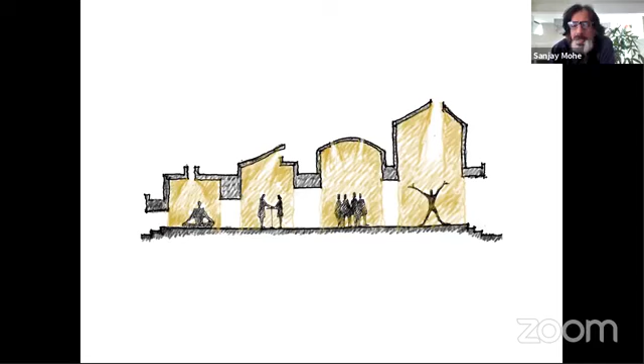So when you're designing it, you're actually putting all these elements together, trying to weave the whole story, which eventually becomes a building and becomes an experiential process as you go through that whole journey of discovering architecture.

Now, we tend to do a lot of schools, and then you start asking: what is the right classroom? Or forget classroom—classroom is actually the answer, but the question is, what is the appropriate learning space?

And then you think about Rabindranath Tagore's Shantiniketan, where everything is taught under the trees. There are really no classrooms—you just go sit under the trees and learn. You begin to realize those are probably the best places to exchange knowledge, where you're just in the presence of a teacher imparting knowledge into you.

But because of certain requirements for protection from rain and sun, you need a kind of pavilion. These pavilions—you find so many of them in Nepal when we visited last time—historically were probably not only places of worship but places of learning as well. The guru would sit on a slightly elevated place, and all the shishyas would sit around for a discourse, and that would be the place of learning.

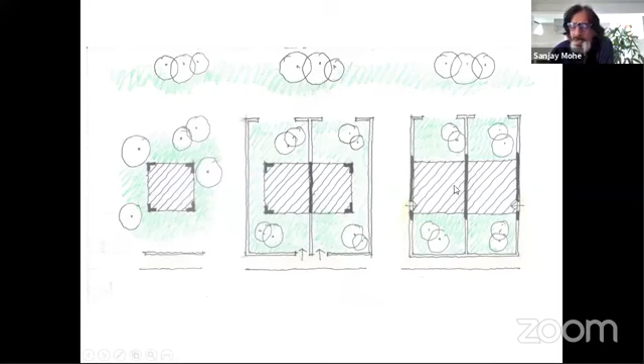So we took that as a module, and we started working on it, where you have this series of classrooms with courtyard on either side, which eventually leads into the green space outside.

So that's the section where there is a central courtyard, which is common for everyone. And then you have these attached courtyards, and then you move around. So this is like a pavilion which opens out into the court on this side, court on the other side.

If required, this is in Hyderabad. So when the temperature goes beyond 40 degrees, you can enclose it and air condition it. But otherwise, it is open.

And you have a choice of conducting a class in this semi-open space, or you can take the children and sit under the tree and work. And this particular school gives you options to exploit all these different possibilities.

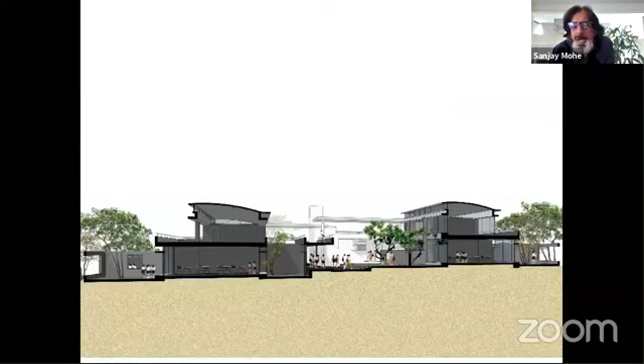So the section, you have this common courtyard for all the children. You have a classroom with courtyard on either side, and then there is outer space. And this is something which typically happens in our courtyard house, where you have a road outside, you have an open space, then you have a semi-open space as a courtyard, then you have a semi-enclosed space as a veranda, and then you have a closed space where you need privacy, security, and things like that.

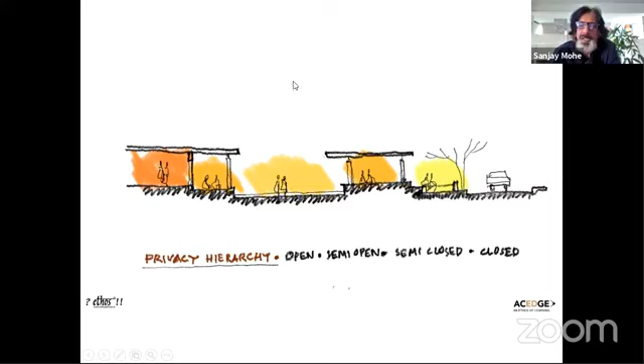So the house is a series of these enclosures of different privacies, where you have a hierarchy of privacy, where there's a place outside where you communicate with the outer world. There's a space inside where you communicate with your family, and you communicate with the sky above. And that's how we started building this school, giving those different kinds of privacies.

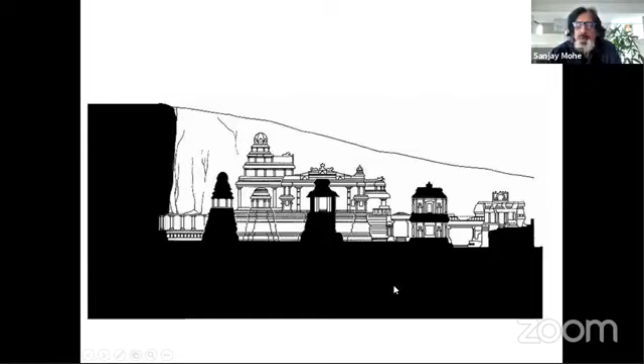And this was something amazing too. This rock, it is part of the hill, part of these wonderful spaces. And this is how it looks when it is carved out. And then we were thinking of relating that to creating some kind of a non-building which would become part of the nature, which will get absorbed into the nature.

So we started with this as a water body, which is a bio lake. Then we created this shallow lake, which is for the firefighting water, which you need about 3 lakh liters of water for firefighting, which became a shallow lake.

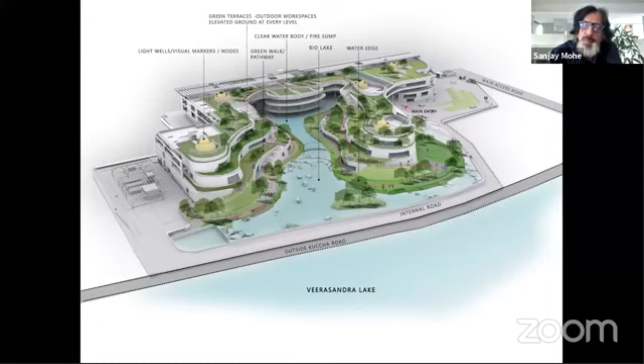And then you can walk across the entire skin of the building. And they wanted a nature campus, which is what it is. And during lunchtime, you walk across this and you meet all your friends, colleagues, and interact through. And then there are these 5 vertical kind of atriums, which symbolize each of their Titan verticals, jewelry, watchmaking, and things like that.

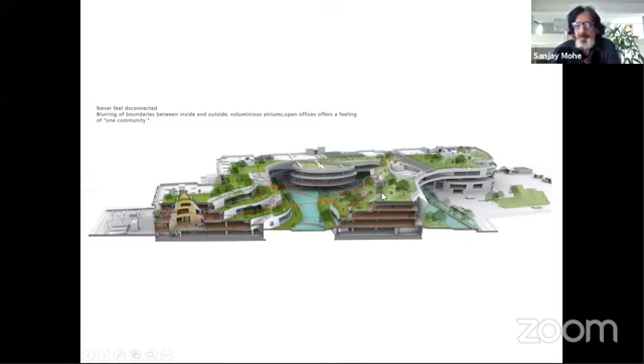And then there is a lake next to the site. So we were trying to relate it to the natural lake, to bio lake, to this shallow water body. And then you have a connection from here across, right across, and connect it almost to the horizon. And you bring in light from the top. And as a section, we were working with these terraces along the water, and then creating almost like a valley along the water, and creating a lot of interactions along.

And right from the beginning, we wanted this to happen, where even Titan was very keen that people should take their laptops, go sit under a tree and work. So you have a possibility of working indoor or outdoor, and that's what happens. So the entire office is like a veranda. It's like a glorified veranda where whenever you want, you just come out and sit.

And this is not an air conditioned space. It is air cooled. There is a humidifier, and this is evaporative cooling, which is used on a very large scale. So during this situation, the COVID situation, where we don't want air conditioned spaces, this seemed to work much better, because there is 100% fresh air pumped into this. There's hardly any return air which comes in, so you are always surrounded with the fresh air. And there is a large saving in terms of power consumption.

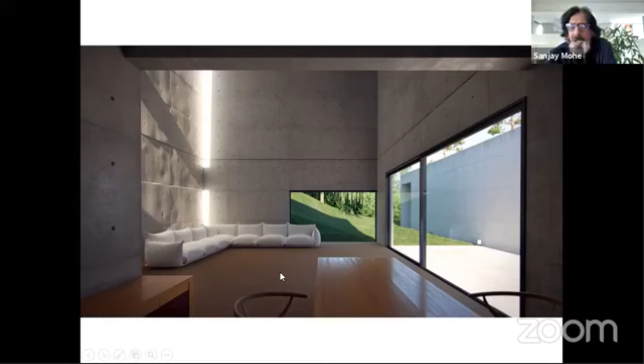But as an Indian, or even as a Nepali, I don't think so we will feel very comfortable in occupying this space, because our culture is more about absorption. And this is what we see in a typical marketplace.

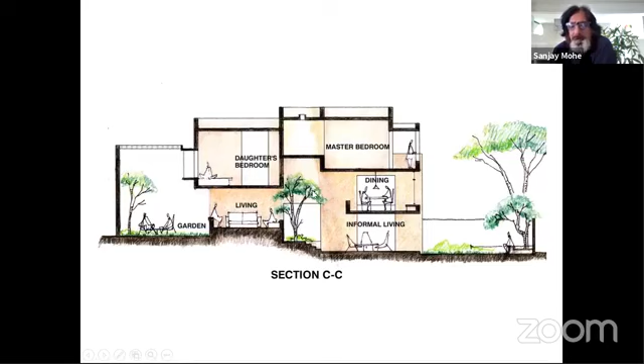This person, Anil and Champa, are very close friends - I'm in this house almost every 15 days, so I'm really almost like part of this family. I keep telling them they should remove this, but for them these are memories. Every time I tell them to remove something, they say, no, I have a memory of this, I bought it from there. So for them, the house is a collection of memory.

And for all of us as architects, we cannot impose our ideas and say that no, it has to be a minimal house - you can't add this, you can't add that.

What you have to do as an architect is create a place for those memories to happen and exist, and that's how it becomes a collection of memories. This house is not for you to photograph and publish. It is for Anil and Champa to stay there and enjoy those spaces. These are their memories, their possessions, and they have to be happy and comfortable, as each one is linked with something of the past. So that's one project we completed long back, and now we recently finished one.

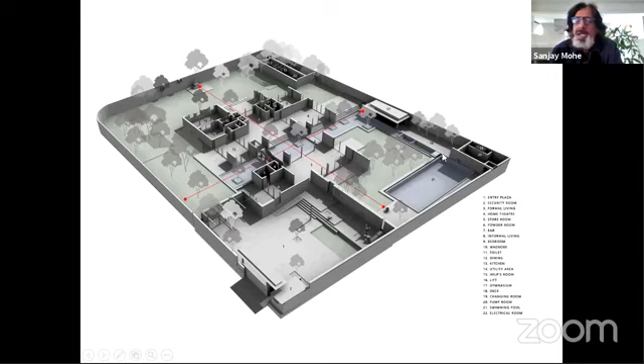You climb up to an informal gathering area. There is a bar here, opening out into the large party lawn. This is the dining area, kitchen, and utility. Then there's one guest bedroom here, an informal living room which opens into the large green space, a gym, changing room, and then servants' quarters.

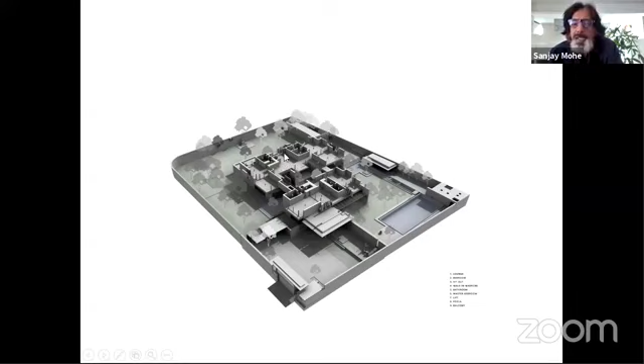On the first floor, there are four bedrooms with a breakout or informal area, and each room almost opens out onto three sides, with a large terrace attached to each. That's quite nice—you are almost within the trees, with branches everywhere surrounding you. So whenever you are in any of these rooms, it almost feels like a tree house, which I'll show you in the pictures.

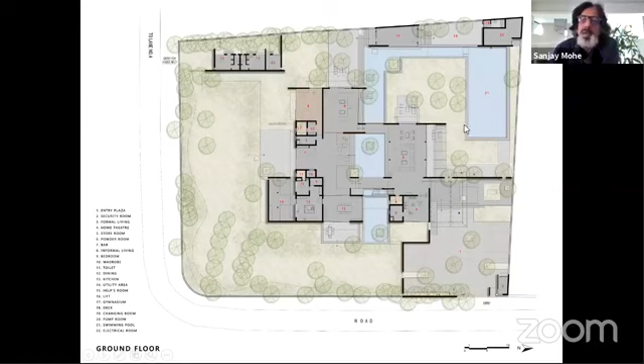So that's the plan where you come in, that's one room, the living room, the dining area, formal living room, and then the informal living room and other places on the upper level—these are the sections.

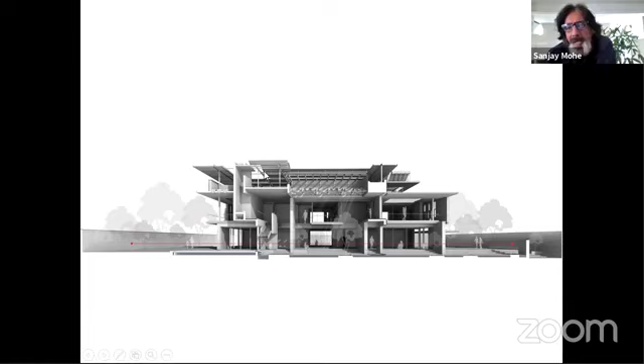This is in Pune, and Pune summers can get pretty hot. So we have this shading device with a large gap of almost 2 meters at the top, so hot air goes beyond that and gets flushed out. It has louvers on all sides, so the air goes out and that really controls the temperature within the space. That's the skylight, and these are the other sections—the whole volume feels like one connected space.

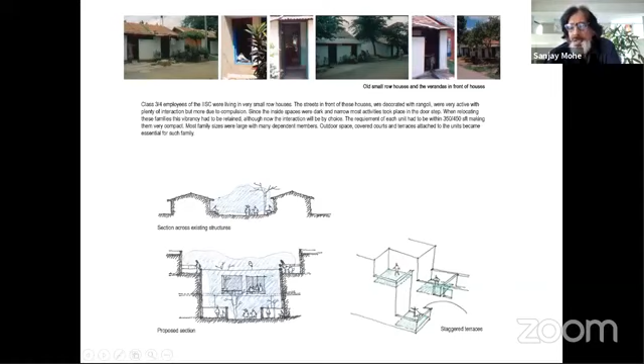A lot of activities could happen during the daytime - even the kid can sit and study here. So we created these terraces at different levels and started creating this whole street with bridges going across, with only 2 of these elements turned to create dynamism into the whole street, and there's a lot of openings here.

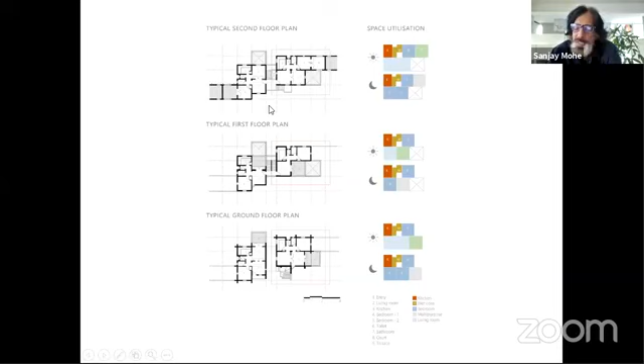These are more like a series of rooms because the rooms were so small, and normally the family structure is very large. So at night, the living room would be used as a bedroom, or even the kitchen could be used as a bedroom. We were trying to analyze the area - how it would be used during daytime, and how during nighttime it would turn into 3 different rooms for different uses. So it was built on that basis, and this is how it looked.

And you will see those different terraces. There were issues here in terms of us not being sensitive enough to understand that they would start using these terraces for washing clothes and such, which created a problem for the people staying at the lower level. But we learned a lot of things through this, so it was a nice exercise.

The idea was that even those who stay here would feel connected, with the way these creepers were grown and things like that. And the kind of activity we were looking for started happening.

And now this is what we have done, after so many years. We were looking at something that had to be constructed at very high speed, because use of technology was important. This was again for the affordable section.

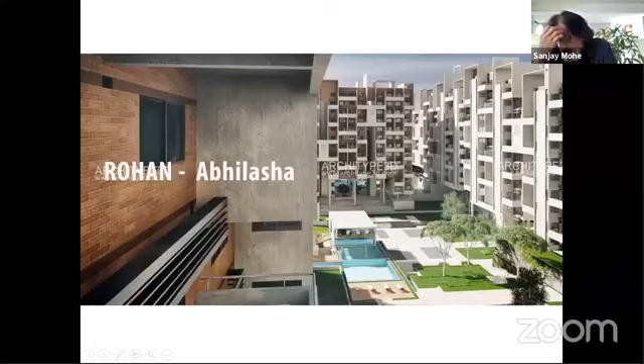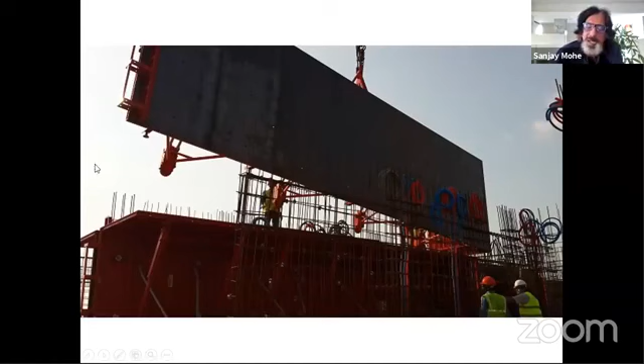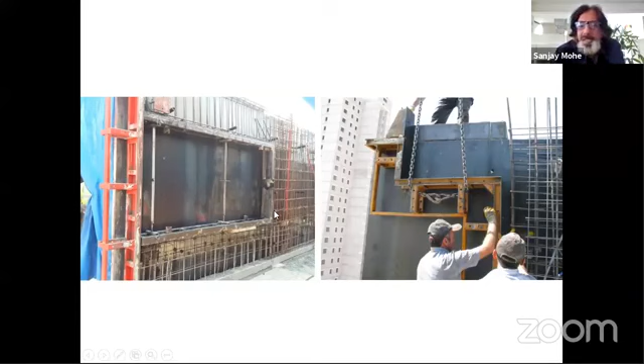So we went to Turkey to understand this tunnel forming, which is a formwork like this - I'll just explain it - which is lifted up and placed into position. Then you have all the services built into that whole fabric, all the windows, electrical things, etc. Then these 2 L-shaped units are tied together, and the entire thing is cast at a time. You have to build this platform.

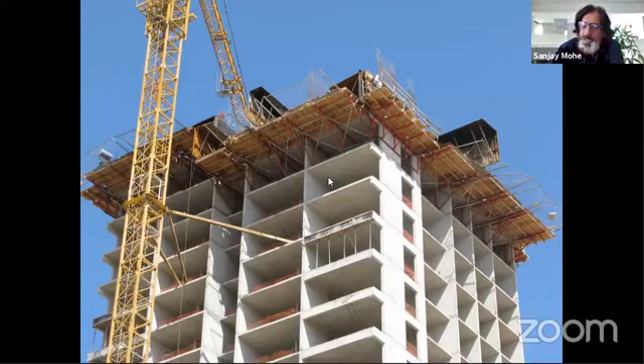Now this was in Turkey, and whatever we saw was very, very repetitive, though the quality of concrete was quite amazing. The whole place was very repetitive. So we were trying to see how to break that repetitiveness and make it more interesting.

So the plan had to be built on these modules. As you see, there are these L-shaped elements - they are all put together, creating these tunnels. Then you put all of them together and concrete it together, so you are concreting wall plus the slab together, along with all these openings and things like that.

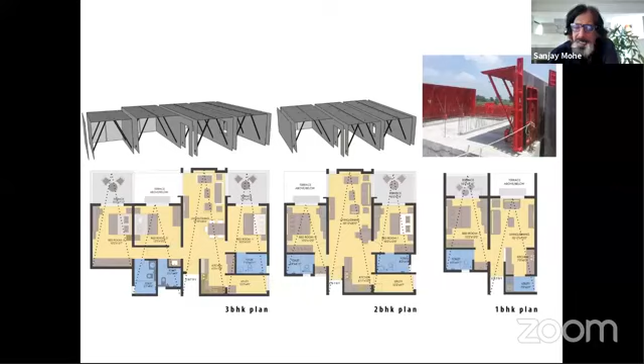Then these tunnels are removed and placed on top, and this goes very fast. Every alternate day you pour, leave it for one day, remove the shuttering, keep a few props to hold it till it gets cured, and then you move on. Literally you can cast 15 floors in 30 days - the speed was absolutely enormous.

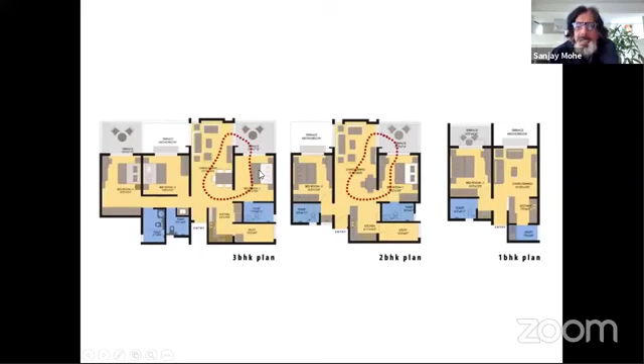So you have these plans, and we tried to create variation in the skyline, which was possible by stopping the formwork at different levels to get a varied skyline. We created a lot of connections across, so that there would be variation.

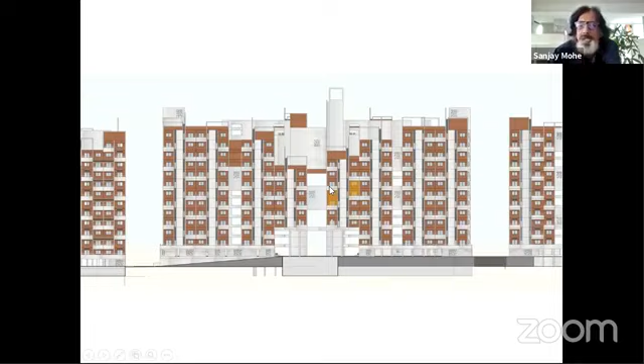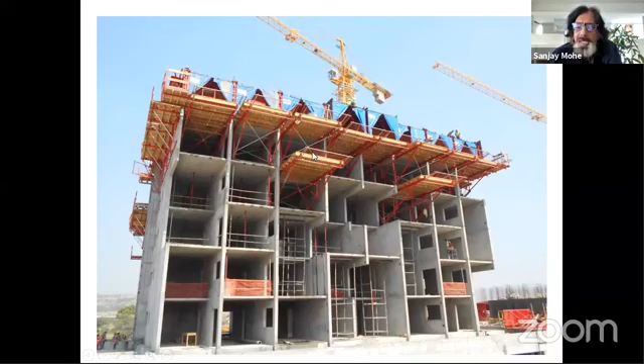And then the most challenging thing was to create double height spaces. So when you build this tunnel on top, you need to have these platforms around. We devised a way of creating these double height volumes, and that's how you see this whole process.

The first 2 floors are built conventionally. Then you build up these tunnels, cast them, remove these tunnels, and place them on top. The whole process goes on one after another - you do this, then that, then that, then that.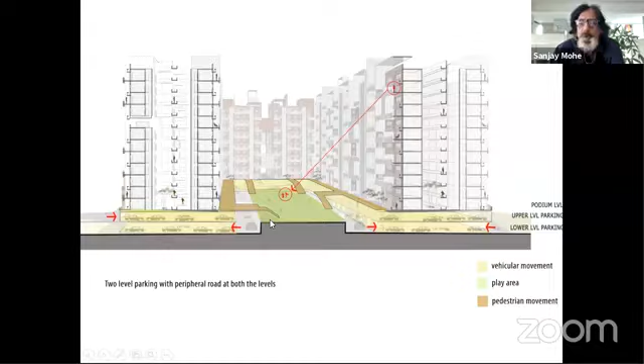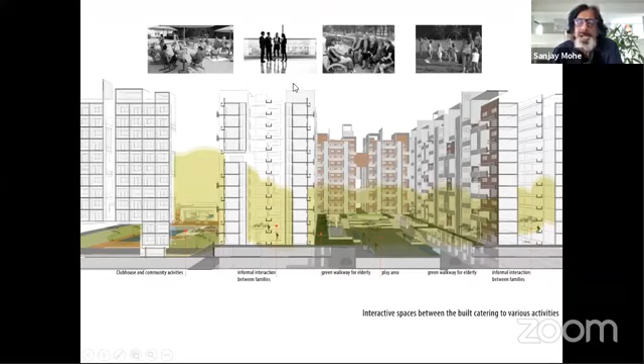We wanted kids not to cross any vehicular road, so there would be a connection with the mother looking at the kid. We created the landscape so that no kid needs to cross a vehicular road to reach a green space. You have these elements going across till you reach the central green space, creating different spaces for different age groups, from toddlers to youngsters to old people, and different kinds of interaction spaces.

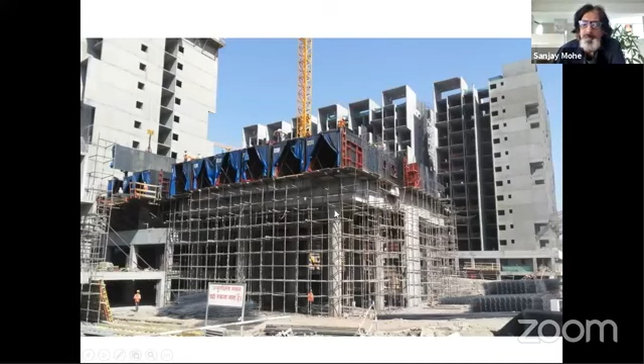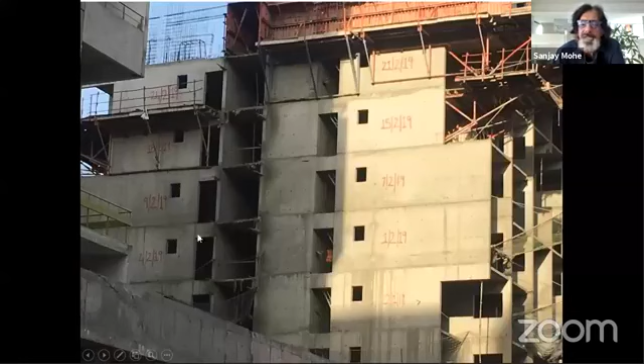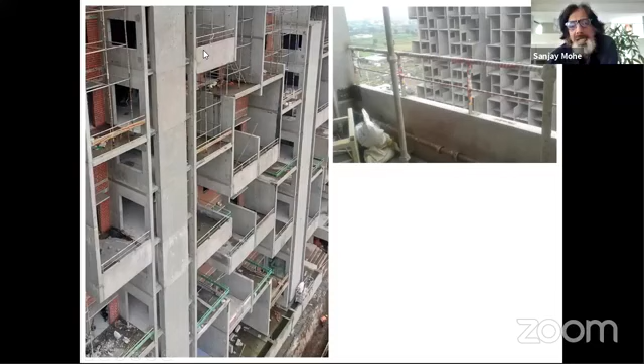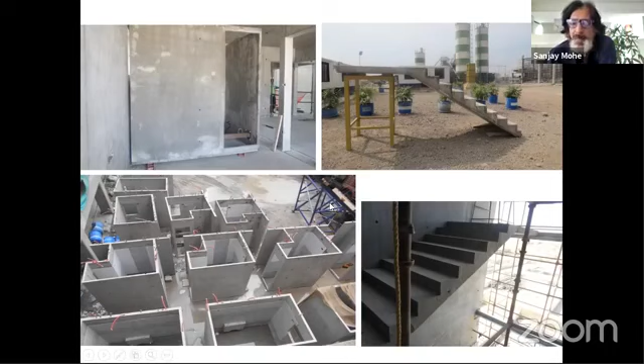Even the different types of railings have different combinations. There are a lot of precast bridges which are lifted up and placed. There are precast toilets done on the ground, lifted up and kept, so you already have a finished toilet to deal with, because you don't have to wait for the tiling of each one to finish. The staircases were precast. That's how this whole thing came up, and this is how it started looking eventually.

Moving on to the institutional project.

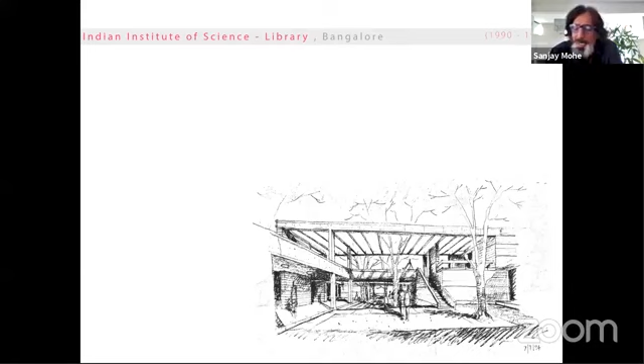So we started with the first approach: to preserve those trees and make them the whole nucleus of the library, building almost like a fortress around that. That's how the whole idea came in. There was one small ditch next to these big grown trees, and we started putting the built-up area around that, because you have to preserve the books and create these necessary enclosures.

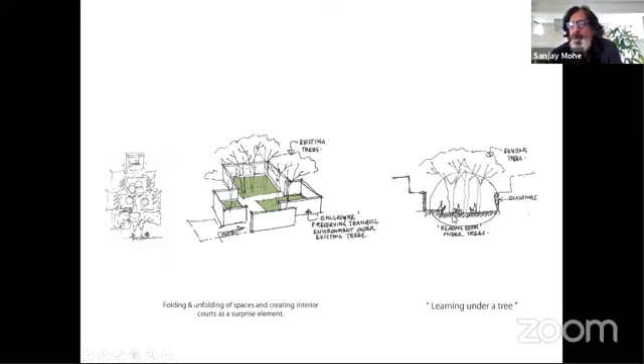The first reaction was - if these are the trees, why not preserve them and create a sense of enclosure where you take a book, sit under a tree, and learn. So this was our first reaction, to use that space underneath. Then we said each one of us has a different way to concentrate and learn - somebody like me likes to look at a blank wall and study.

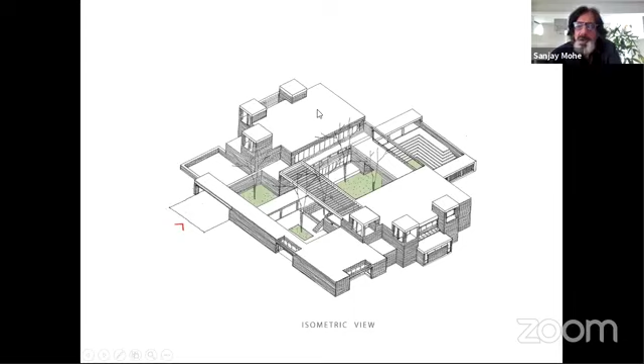Somebody would like to have a double height, somebody would like a very low height. Somebody might like to look out at a tree and learn, or just put their feet in the water and study, or sit on the terrace. So we try to create all these options. You take a book and go into any of these spaces and start doing it. These are all places where books are kept, but you have options of sitting in different places and start learning. This is how it was done.

These are the group of trees which were preserved, so it does look like a fortress, almost preserving the books around. And you have a choice of taking this. This ditch was converted into almost like a temple tank, where you can put your feet into the water and sit.

And now we have done this school, which is recently done. In fact, not yet occupied because of COVID. Otherwise, by now it would have been running. But this is part of the larger complex, next to a play area.

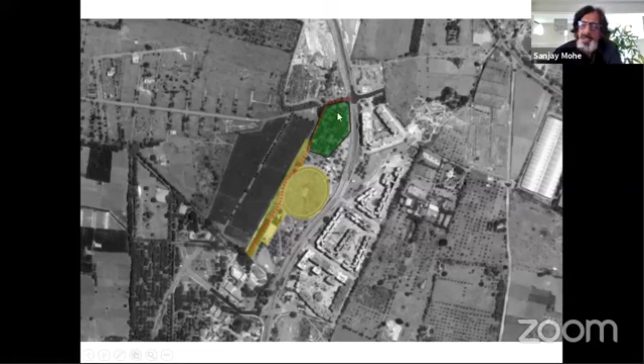So this is where the site was full of trees. And typically you have these different 8 types of intelligences for each kid. Some are smart in music, some in logic, some in spirituality, some are into sports, some into language, and things like that. You have to nurture all these intelligences to create a great learning environment.

For the smaller kids, you can see how energetic they are - they can't sit quiet at one place. So you have to create a place suitable for that, on the floor. It's almost like a school within a school.

The relationship with the teacher is different. The facial expression - she would explain everything with facial expression. See the involvement of the kid and closeness of a teacher and a student, and the way they play with all these materials. When they grow, the relationship slightly changes.

Relationship with the teacher changes. The play area changes. When they go to middle school, their interest changes. Relationship with the teacher becomes slightly more distant. They become more... the activities of games change.

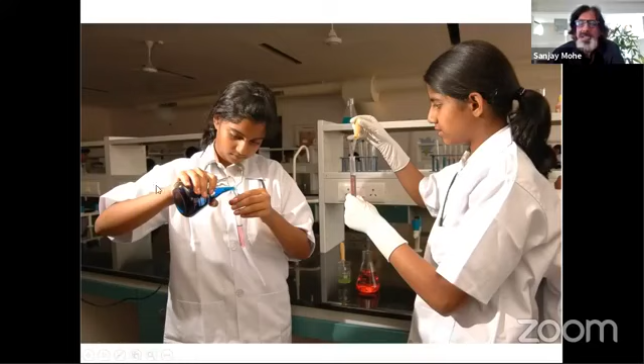When they become adolescent, the whole body language changes. Again, they go into more research kind of analysis. The teacher-student relationship becomes even more distant, and they become more independent. They start doing things on their own. The sports become even more competitive, more challenging.

So all that had to be taken into account - as the eye level changes, the space reach changes, the energy level changes, the play equipment changes, the relationship with the parent changes. They are very close to it here, then it slowly becomes distant. Then when you are adolescent, you want to be independent, not close to the parents.

So even in terms of curiosity, the things and observation become different. Initially, you are very, very curious about everything - parent as a hero, parent as a friend, and then on your own. The relationship to color, relation to music, everything changes. And finally, the communication changes - from being very expressive from your face, crying and shouting, you start expressing through words, through body language, etc.

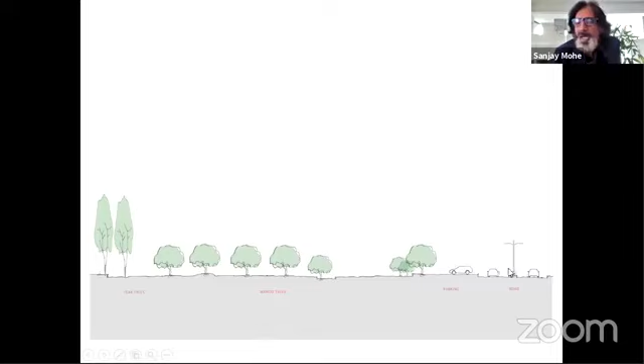So this was a site full of trees, and there is a road on the other side, and we had to build this. We tried to preserve most of the trees - a few which came into this had to be removed, some of them we preserved within the skylight and all that. But the whole idea was creating that transparency at the ground level, where you reach from outside to inside and create this quieter zone here. This is a noisy area on the other side - not noisy right now, but might become noisy after another 10 years.

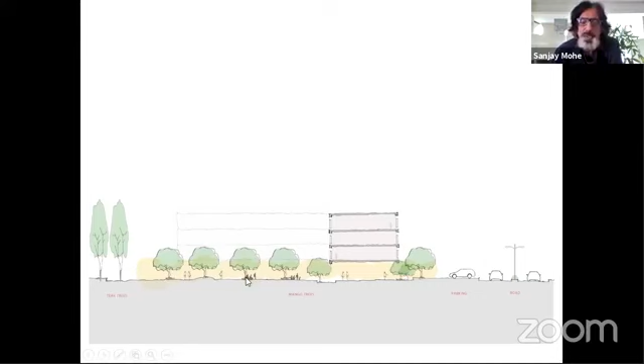So this is where the classrooms would come. That's the activity area, and we wanted to use the activities under the trees, and try to make use of that. So we tried to create a kind of a spine.

Again, this project I'm showing for the first time because it's just getting over.

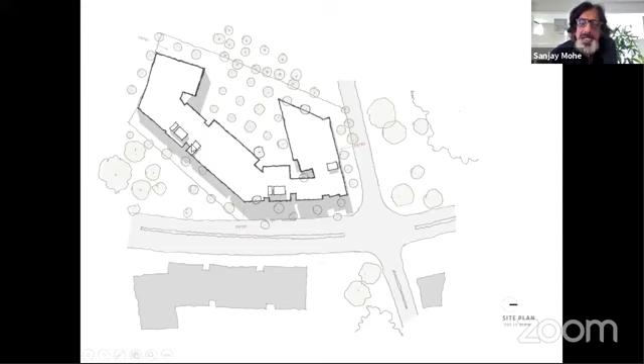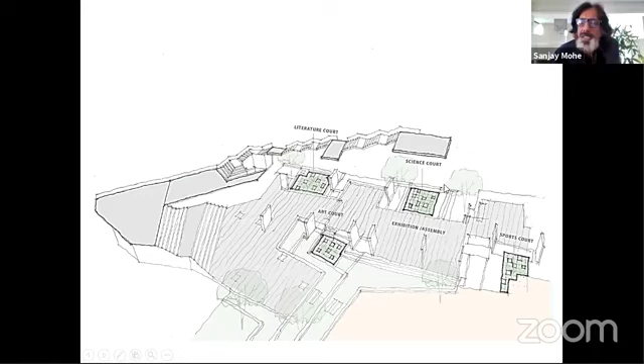So we were trying to create a pathway which is kind of climbing up. It starts from here, starts climbing up, becomes a kind of amphitheater, continues climbing up. Then you turn around and start climbing up across. Actually, this stretch becomes part of the facade as you climb up and start reaching different places. And then you have a lot of these interaction areas, learning areas at different points.

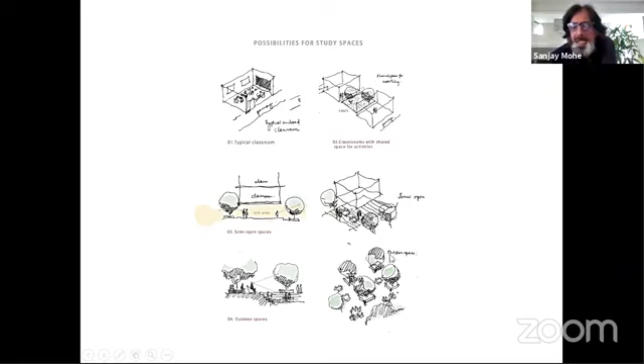We wanted the classrooms to not only be learning spaces, but that should spill over into the areas under the trees and into these courts. So that was the intention of spilling across. The way the section worked, you had this interaction and then it sort of moved across into the space.

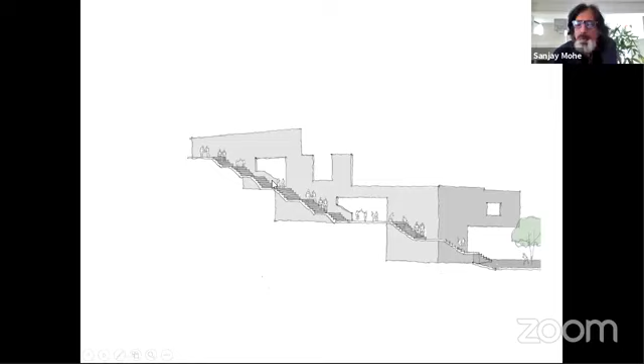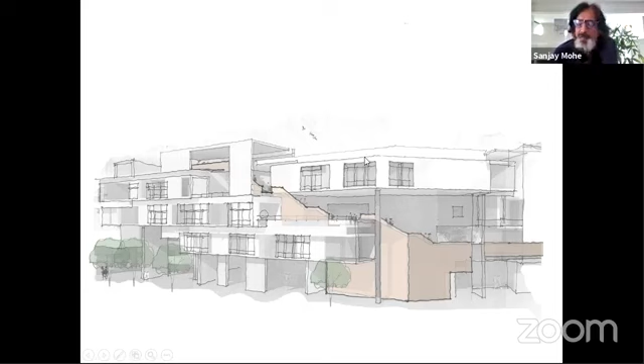This is the path which comes across with all those different interactions. That movement which became part of the external thing became part of the facade externally. We wanted these kids to experience the outer world as they climb up, and at the same time it becomes an interactive facade. So when 30 or 40 kids are jumping, shouting, and climbing onto this staircase, it becomes part of the facade, part of the language of expression, and this is what we wanted.

These clients were very good in creating this precasting. That precasting yard was close by, so we used a lot of precast elements, very thin concrete fins just about 70 mm thick and very nicely done with exposed concrete. We used exposed concrete as an expression, as pavers, as steps, and as other concrete elements, and that became the language.

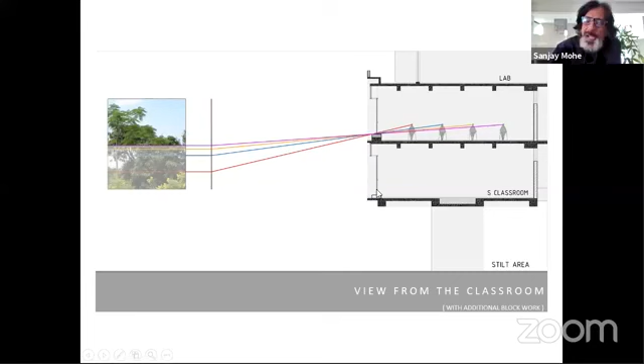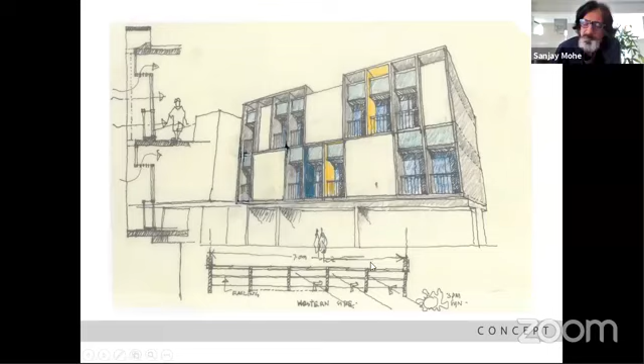We created a ventilation device so that during night, when the classrooms are closed, you will still have fresh air coming in. So in the morning, when you come into the class, it is cool. And then you have these fins which are protecting against southwest sun.

And then you have this ventilation happening here. These are all the outer facade. Do I have time for one more, or shall we close here?

No, sir. So please continue.

Yeah, okay, yes. So it's the last one. I'll take 10 more minutes.

Of course, yes. So this is about the spiritual building, and we were asked to do a temple, a Sai Baba temple, which was an existing temple that had to be redone.

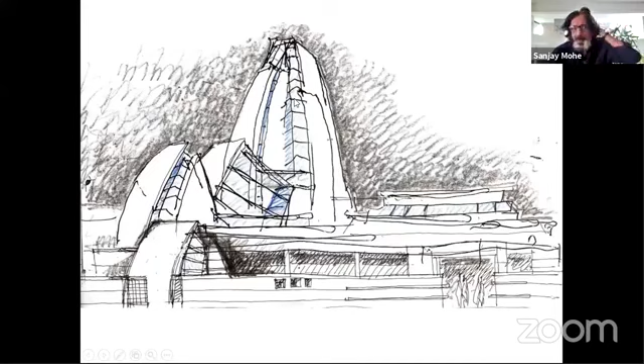Actually, this is an image of a temple, because if I show this image to any kid they will tell you that this is a temple. But if you want to create a modern temple, how would you do it? So you start with this and you start modifying this image, and we started modifying it. We are almost trying to delayer this - each layer, you're trying to remove that layer, and then you're trying to bring the light into the space and create these cascading pavilions kind of a thing. And this is how that whole structure kind of developed.

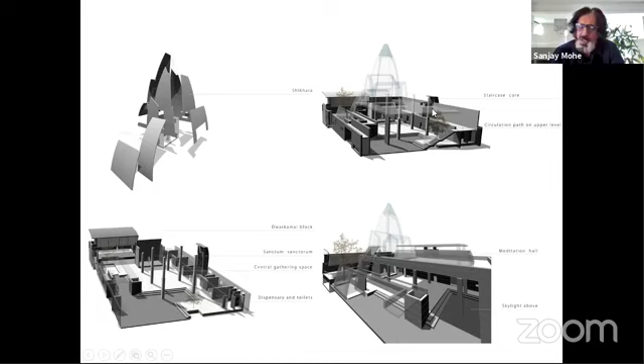We were looking at a kind of space which would create spirituality, which would connect and make you feel spiritually connected. So these were all initial things. Then the idol, we couldn't move the idol which was existing, we had to build around that. So above that idol, we had to create that kalasha, which is the highest point. And then the whole form came up.

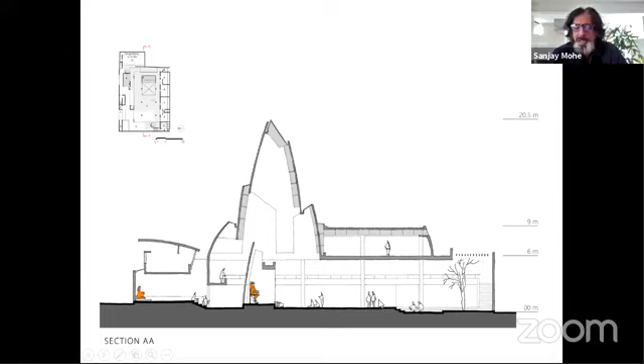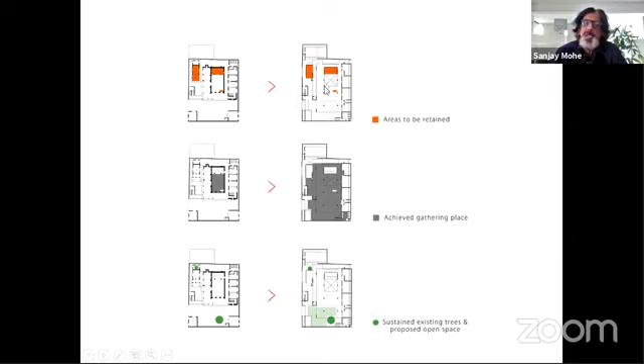This is more like a spiritual discourse room on top, and this is a place where devotees can stay who come from out of station. That's how the whole section came in. Structurally it was quite a challenging thing, and this is how the entire thing came up. These were the sacred places of the existing temple, which had to be preserved and built around, and the Pradakshina path, and this is how the temple came up.

So this was long back, again not too long, but I would say about 10 years back.

About 3-4 years back, we had to build a memorial for Dr. Anji Reddy. He was an industrialist, but he used to be a huge philanthropist also. He created very affordable medicines, Dr. Reddy's Labs, created a lot of research, came out with new research ideas, but also did a lot of things for students' education, for some villages to create water supply, and so many philanthropic things. I had worked with him very closely, and when he passed away because of cancer, the family decided to create a memorial for him.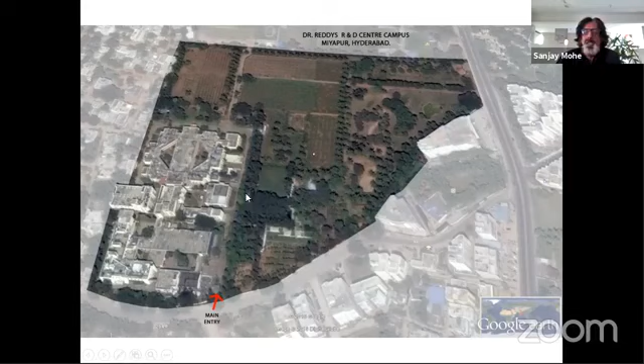So we were asked to choose a site out of all this area, which itself was a difficult task. The whole family called me and said you choose any place where you can build a monument for it. So we found this to be the most appropriate place, and I'll tell you why.

There were this series of trees. There was a scooter parking and all beyond that. This was an existing lab space where he used to work, and he used to come from there, take this path across, and then go to his house beyond.

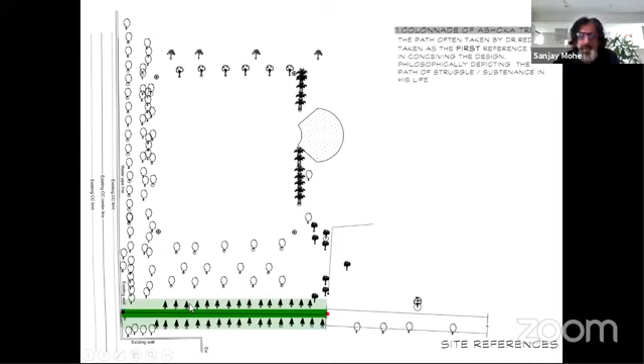Now there are different situations happening. This path looked like this, which was almost like a mud road. There was a peepal tree here, a Bodhi Vriksha as it's called, under which Buddha got enlightened. This has religious significance, and it's a symbol of education as well. So that tree was there.

This was another path, which was like this, but the boundary of the research lab was here, so we asked the family to remove this and move it here. So this belongs to the research lab, and this also became part of the monument.

The third one was this row of trees, which were like that. When you see from here, it almost became like a wall. So that became one strong reference.

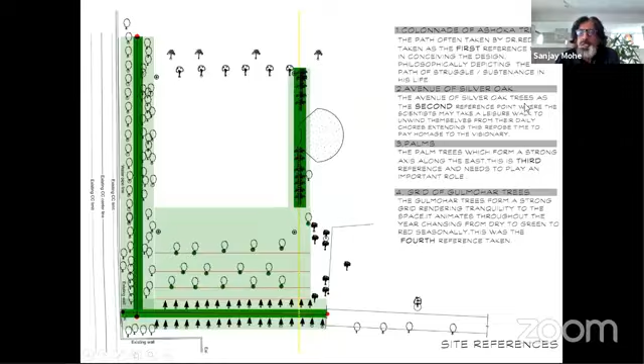The fourth one was a series of Gulmohar trees, in a line, in a kind of grid. Initially when we saw them, they were not so healthy, not looked after well, but now they are absolutely thriving.

So we took all those references and created this whole framework. This is the path that he used to take, which became a symbolic path of his life. He grew up from a small village and became a big man, so this path represents his life.

It starts with very rough stone. Then as he graduated, he learned and became, some stones become polished, then they become more polished. Then that's the time he got his Mercedes Benz and his money, but at that point he realized he had to do a lot for the people, and that's when he became a philanthropist. So that's where everything becomes grass and nature, and the path becomes almost part of the nature, and it meets that Bodhi tree at the end.

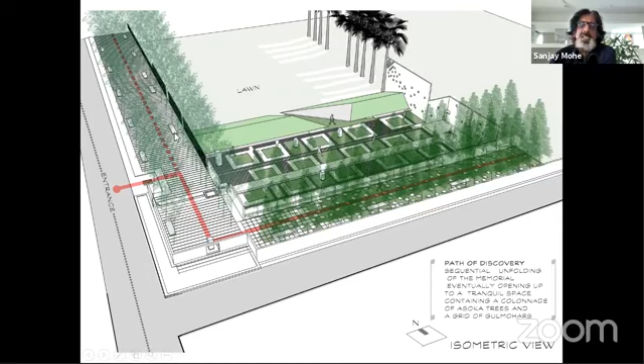So this is one path. This becomes a second path, where at lunch times, some of the scientists who still knew him and had worked with him walk as leisure, and on the way they sit on these benches, which have some inspirational quotes and all, which I'll show you. And then they get a glimpse of this samadhi, which is there, which I'll explain to you later.

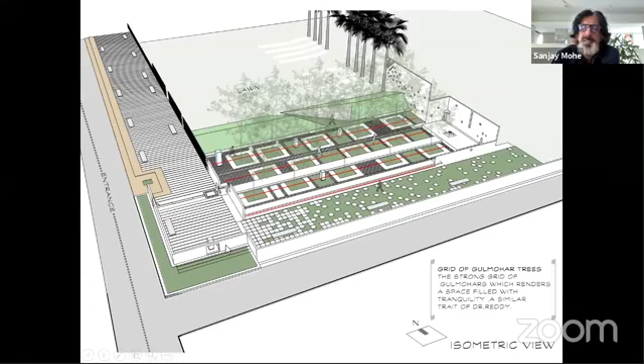The second thing was this grid of trees, which were Gulmohar trees. They have this character of turning completely red. This is called Mayflower, so during May, June and so on, it becomes completely red and the whole ambience changes.

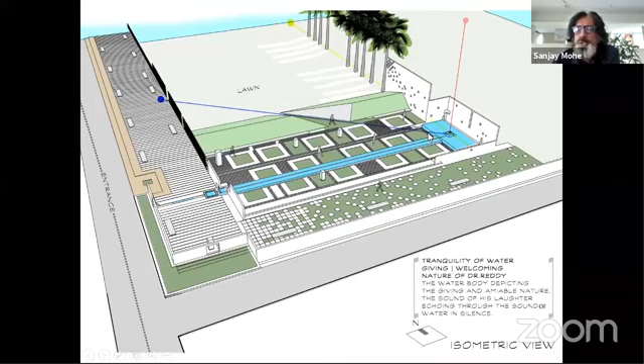We had to position the samadhi where the ashes had to be buried, which had to be done very quickly. So we created a path within the grid of trees and created that void where the ashes are buried. So that became a relic.

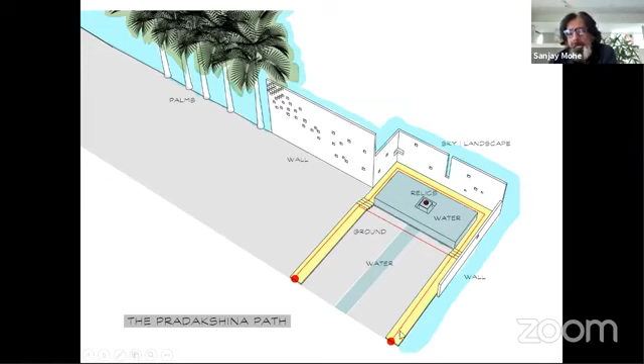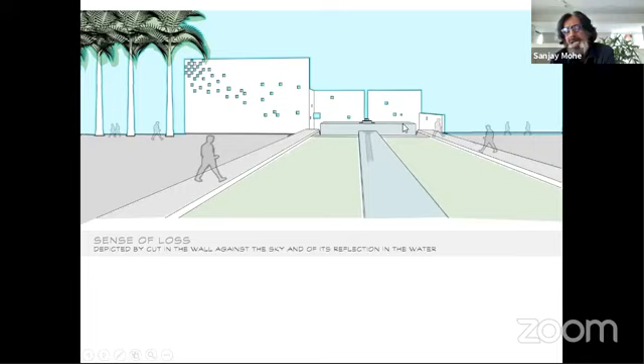So those are there, and as that became a void within the water, we wanted that water to come close to your eye level when you take a pradakshina or walk around. So we dipped it down, and when you go down, your eyes come very close to this water and you see the reflection of the whole thing.

We wanted to show the presence of absence, and there's a video called Presence of Absence based on this. We wanted to show that absence, which is this void, gets reflected as a void here into the water, and then you see that reflection in the water.

He was a man of a team, so he would work with people, take people around. So it started very low and became bigger and bigger. Even these openings start with one, then become 2, 3, then more, then become a group, and finally they become nature, and it becomes this wall. So this wall, which is an artificial or built wall, becomes a wall of nature, and still gets connected. All these openings get lit up at night.

Actually, the inauguration was on a full moon night, and you see this, and then you see the stars on top. So it's almost like connecting it with the cosmos.

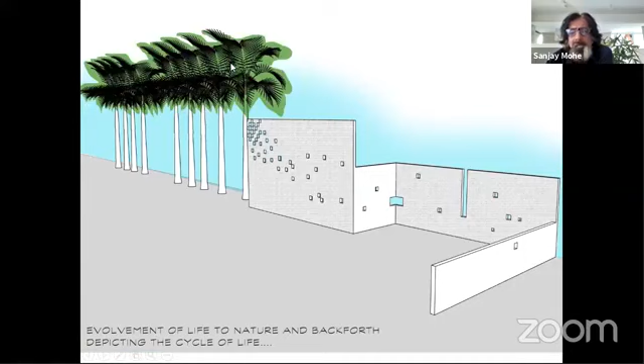So that's the void, and then the idea of giving - because he gave a lot, he didn't just give knowledge, he gave wealth as well. So that idea of giving is expressed.

He had a laugh which was very energetic. We wanted to represent it through some of these wind chimes, hung in the trees, which you don't see but you hear the sound. So these are all the elements put together.

Another thing was he was like a child, he would laugh like a child. He was also a very transparent person, and we wanted that whole path, the transparency into this, so you almost see through this memorial, symbolic of his nature of being transparent. So all these things are incorporated.

There are 4 spines. There's one museum-like small area with a collection of his achievements and timeline, what he did, and there's one room where his office is replicated.

So you come in here, see through this opening - you can't enter through that, but you see this axis, then you see a second axis, then a third axis where you actually see that void, but you can't enter. So you actually rediscover the whole thing as you come through and rediscover it.

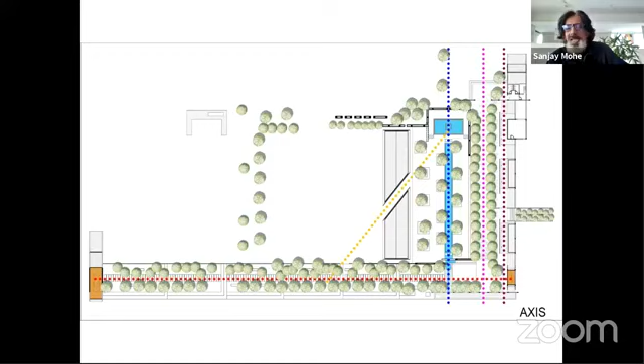So that's the samadhi - this is the first axis. These are the stones I was talking about, starting from rough to semi-smooth to smooth to grass, and then this Bodhi tree beyond. This is the other axis, which shows his different achievements. And this is the third axis where you see water.

You go across and touch it, then further discover it. You come across here, you can touch this water, but that's the bike you see there. Behind the bike there is a map of where he used to travel in Hyderabad city. This is where you see that void and its reflection, what we call the presence of absence. You can touch the water, but you know that even before entering, you have touched that. So it has a symbolic value.

Then you come across a similar screen to the one I showed you used in the house also, what I showed you first. That's the path the younger scientist would take in the lunchtime. This is when you come in and see this large space, that's the diagonal cut, and you rediscover that whole thing when you come here.

And then there are those wind chimes on top, and you hear that sound. You hear the sound of this water, and you are in the presence of something very soothing, calm, quiet, meditative. And here you see the void. We wanted to make sure you don't see the bottom of this void. There's a sense of unknownness to it.